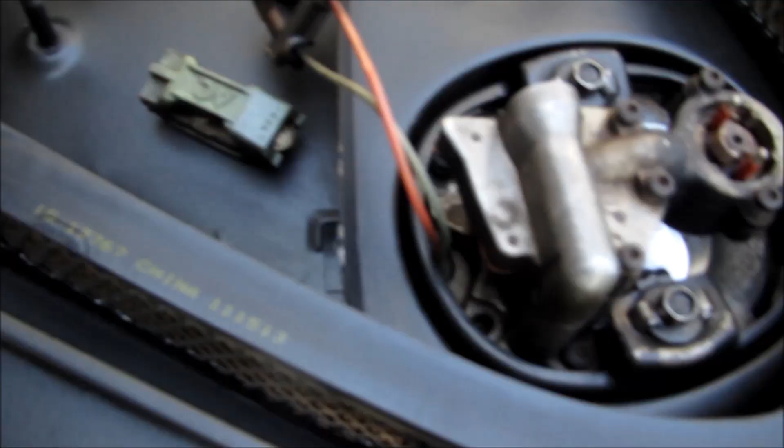This is kind of just a quick little fuel injector test to see if one of the fuel injectors is maybe leaking, in a symptom that would be engine cranks but won't run. I'm not going to do the whole test because mainly I don't want to get gasoline down on the throttle body plates, the butterflies, and to show you only half of the test would make my little video about worthless.

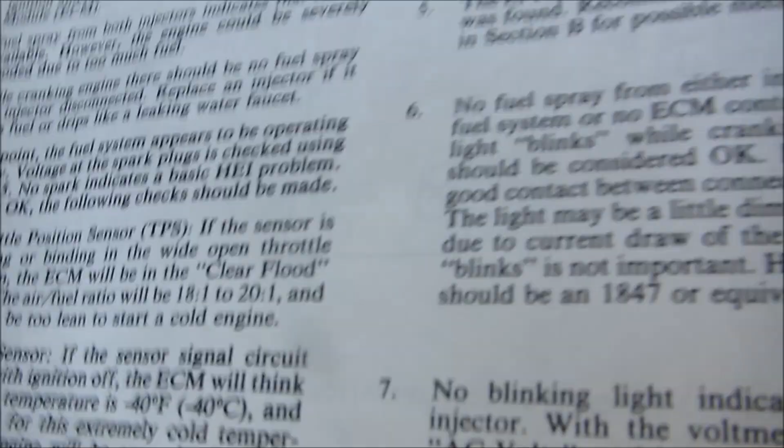But right now the car's cold, has been sitting overnight. There's no fuel on the injectors, they're dry, both of them are bone dry. And what you'd want to do is check that fuel spray from both injectors indicates that fuel is available.

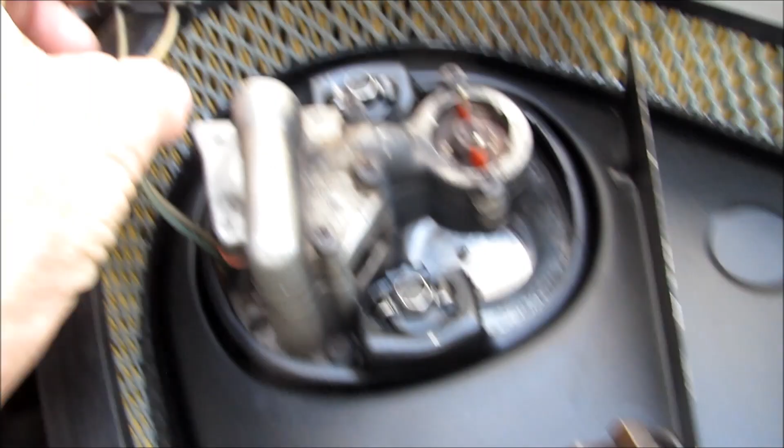So if you crank your car up, if you have help - I work alone so I don't have any help, I have to do this all by myself, so I got to modify the test a little bit. But if you have both of your injectors plugged in, hooked up, and you have somebody crank the engine, you can look at your fuel injectors and see if you got a nice cone-shaped pattern and they're spraying fuel.

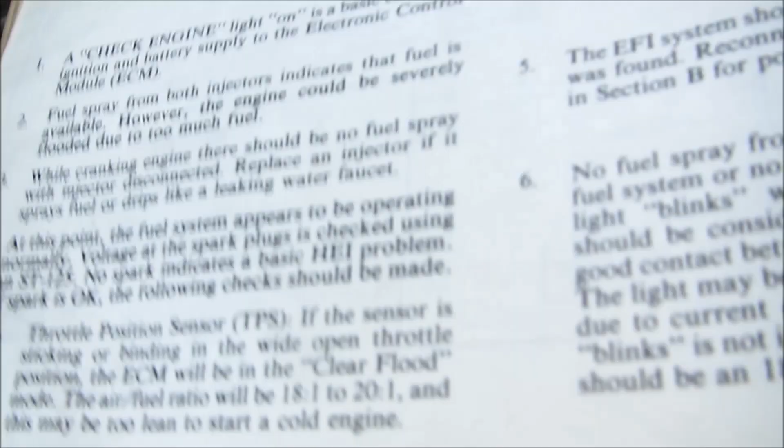Then what you would want to do is disconnect both fuel injectors and then crank the engine over. While cranking the engine, there should be no fuel spray with the injector disconnected. Replace an injector if it sprays fuel or drips like a leaking water faucet. And this is per the factory service manual.

So I'll just... it's really hard for me to do this. Let me see if I can get a little tripod on the engine here.

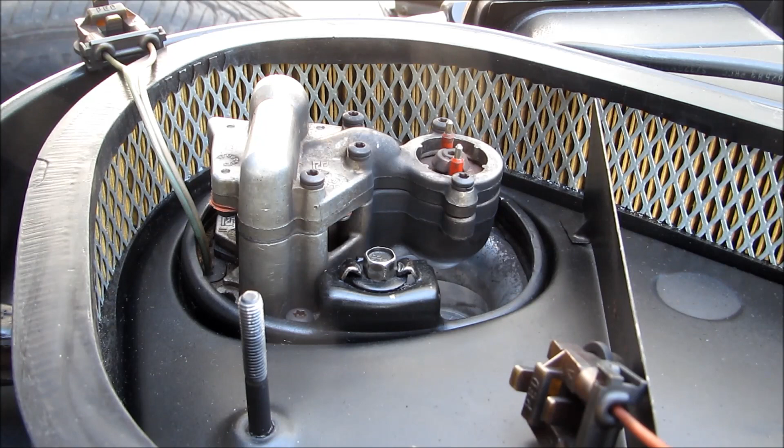Okay, I kind of hooked up a bit of a tripod here to watch the front fuel injector. Now basically what the factory service manual is saying is if you disconnect both fuel injectors and crank the engine over, you should not have any leaking coming out of either one of the injectors. Mainly because this is a solenoid - it's basically a solenoid valve that operates on a pulse from the electronic control module. So if it's opening and closing, there shouldn't be any gas coming out of it.

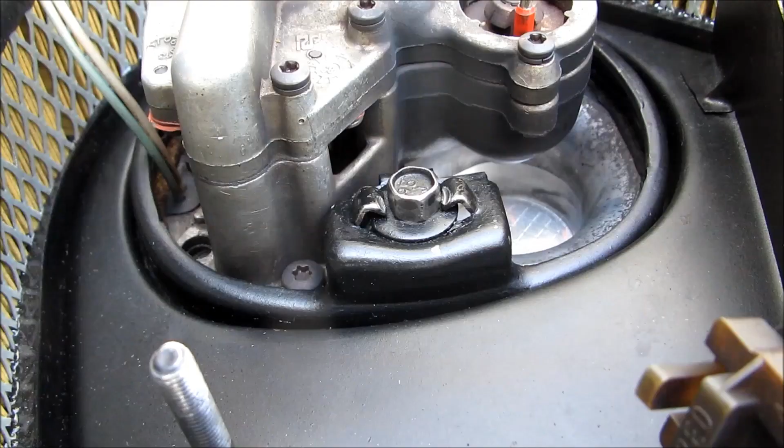But I'll give it a try and see if my tripod will stay without falling over. I'll try this again, see if it don't fall over.

But they're still, both the throttle bodies are still dry, there's no gasoline on at all. So both my injectors are pretty good shape. I've tested them with a voltmeter too, and this is just another little test you can do to check out your fuel injectors, again if you're having an engine cranks but won't run syndrome.

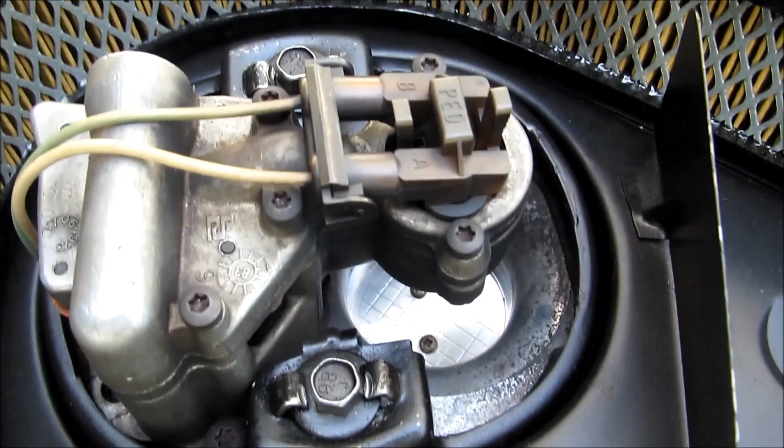Something I forgot to say before you disconnect these fuel injectors - you just pinch this together and pull, they pop right off, and then you can feel them pop right back down on there.

But I don't know, it's just me, whenever you're working with an electronic part of the car that ties into the electronic control module, I always disconnect the battery. I never work around, and I never have the key on in the ignition when I'm connecting or disconnecting the battery.

I forgot to tell you, the system is going to prime with or without the fuel injector connectors on the power supply. The system's still going to prime up.

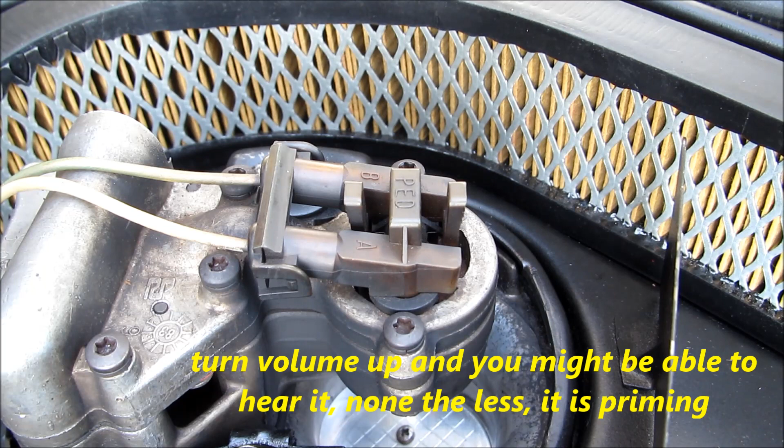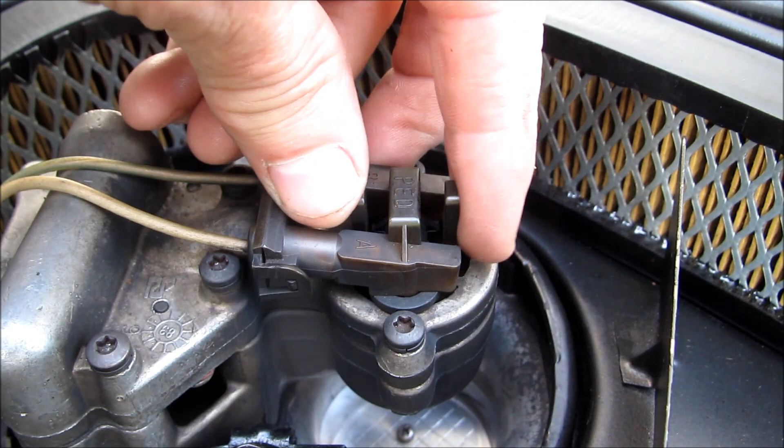I don't know if you heard that or not, but it was the system priming. Take the injectors off, disconnect the injectors. I'll do it again.